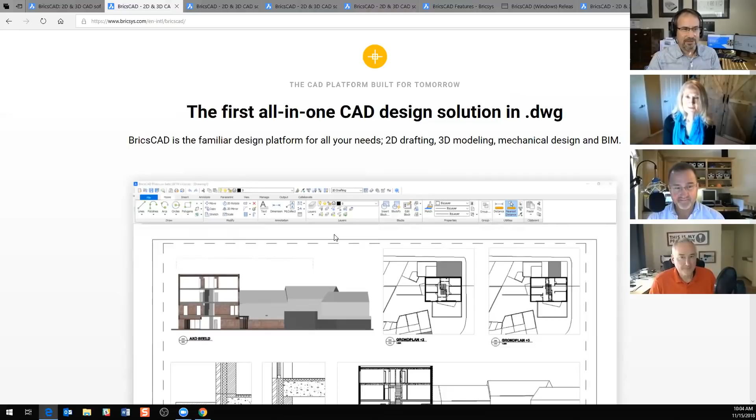Go ahead, dude. Yeah, so folks, if you go to it, it's a brand new website, same URL though, but as you can see, we have a whole new look and feel to our website, our products, and who we are. I'm just going to click through some of these. This I like a lot, just the first and all-in-one CAD solution for DWG. And believe me, folks, for somebody who's been around like me and my colleagues here on the broadcast, it's nice to see the file format DWG just grow to what it is and what BricsCAD has been doing for DWG.

Don, I'll pass it back to you to describe this one. Wow, yeah, so guys, people keep saying, well, is it faster than that other CAD product? Well, we've got 3 independent articles quoted here on this panel on the webpage, and you can see faster installation, faster execution of Lisp routines, and the CAD Tempo team did some analysis of a batch process, opening 500 drawings and making changes.

And Patrick Hughes published an article that's on our blog. The links are there live. The source article links will take you to each one of those articles so you can see the method they used to do the testing. In reality, it doesn't just feel faster, it is faster. And when you make drawings for a living, when you model for a living, when you create assemblies or building information models for a living, speed is super important.

Try BricsCAD now. Yes, and then also too, I love this, it's the welcoming for our AutoCAD users out there. If you want to come on over, believe me, it's a simple, easy jump. And we have lots of videos. Heidi and Robert Green did a great one back at our conference, and that's up on our YouTube channel. Yeah, check out the YouTube channel. All the conference videos are up there, you guys, and a lot of great new materials.

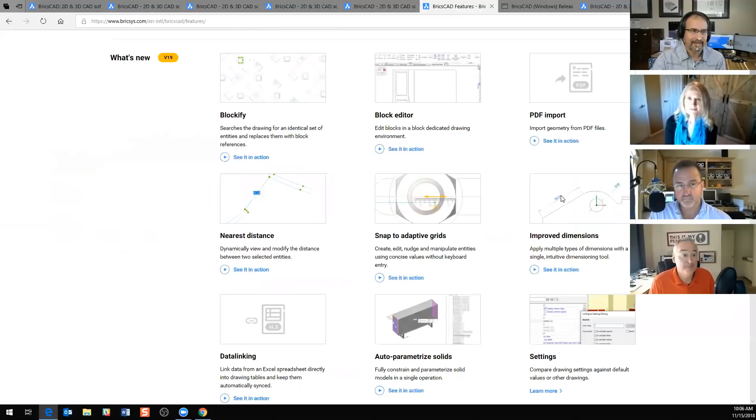Okay, now let's get into some good meat though, and this is where we get to let Heidi do some demonstration here. But everybody out there, there are so many new features, and we're going to show you a sampling of those. And Heidi is going to demo off, I think, Blockify first. Is that what you're going to do, Heidi?

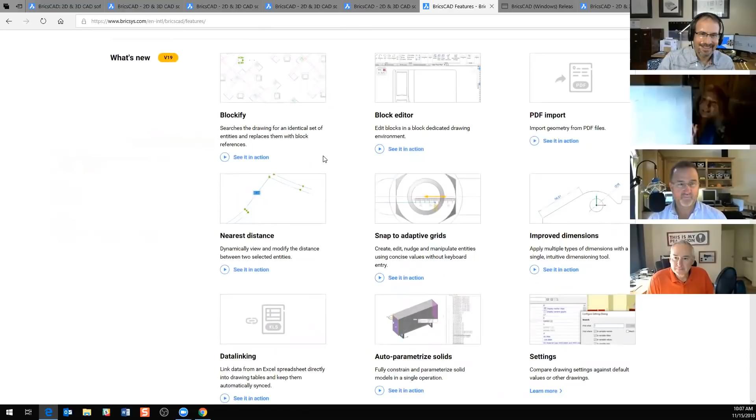I'm going to show some of my favorite features, Blockify and Parametrize, which are two of my magic commands. Just remember, if it ends in 'ify' or 'ize', it must be really cool and magic. I'll show you a few minutes of them. They're so cool, I like it.

Well Heidi, I'm going to pass it to you so you can share your screen and show us some of these new features. Great, thank you. Let me move you guys out of the way. Okay, can you see my screen? Sure can, yep. Looks like BricsCAD. Yes, it does.

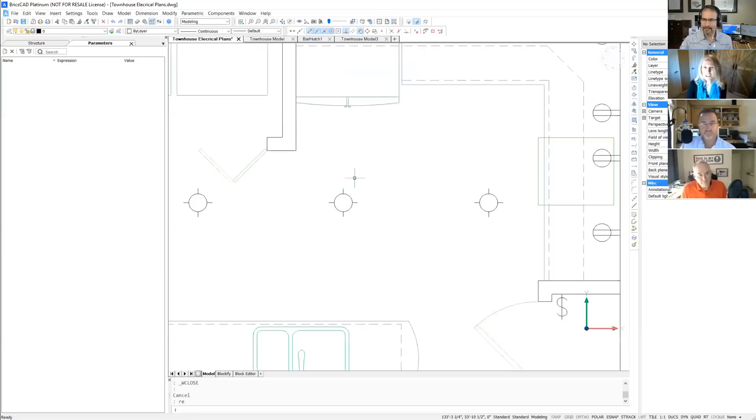The first thing I'm going to show you is Blockify, one of those magic tools. If you look at this drawing, there are actually 3 plans here, and this can happen often where you might have some blocks or symbols you insert, and then somewhere along the line they get exploded. Or maybe you just drew one with a bunch of geometry like this symbol here, just a circle and lines, and then copied and pasted it all over your drawing. But it's just a bunch of different entities, which is not efficient. It's bad practice, but it happens all the time.

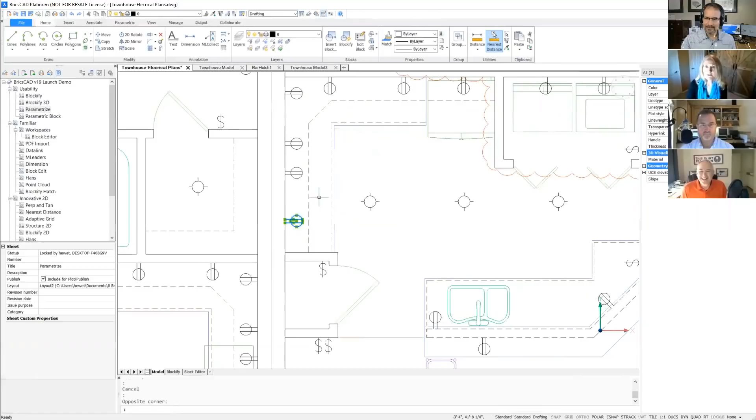With this magical Blockify tool, let me zoom into a few of these different symbols. All of these are individual pieces of geometry, each one an individual entity. What I'm going to do is select some geometry like this receptacle here, and then use the Blockify tool, which I can find in various places. Let me switch from my 3D workspace to my 2D workspace. Of course I could type the command as well, but we've got Blockify right here. So, select the geometry, Blockify.

Now it wants to know what I want to search for matching entities, like those same ones I just selected, so I'm just going to take the whole drawing. Now I'll specify the insertion point I want it to use when it defines this new block. Just like that, within a split second, it took all those little pieces of geometry and created a block out of those. That quick? And it tells us up here how fast — 0.2 seconds, and 96 instances.

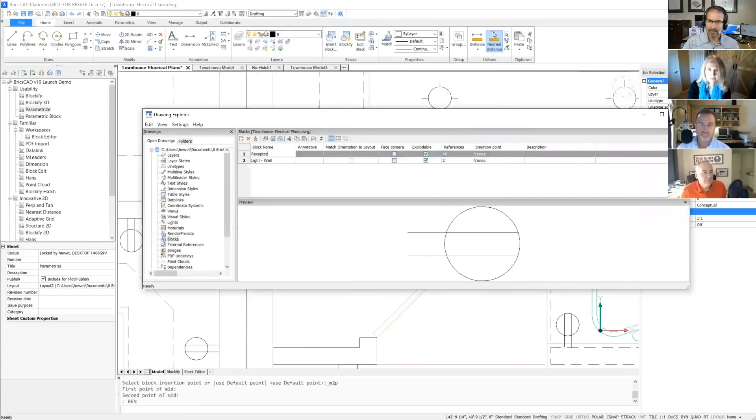So it created a definition and inserted it in all those places, and notice they're at different rotations — it inserted them just as if I would do it manually, but it would take a whole lot longer. So now we've got that block in there. I could do the same thing just as quickly with these other ones. If we look at the block definition, let me do a rename, because it just comes up with some default name. I find it called Block 1, and I could give it a more meaningful name, like receptacle.

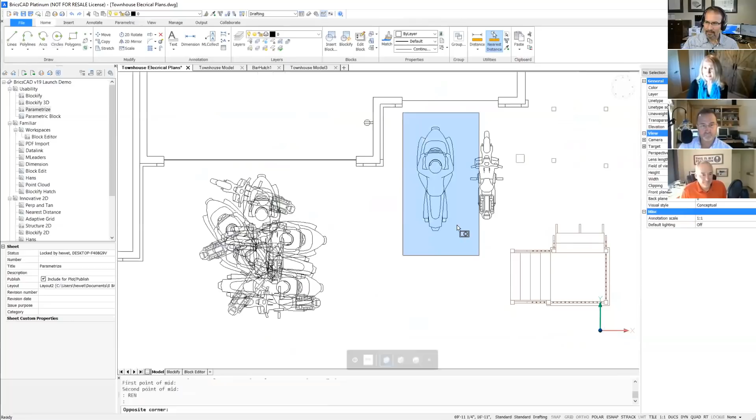Now, it's quite impressive where this can work. If you look at this jumbled mess over here, I've got these 2 different motorcycle type objects, but these are just individual entities, a whole bunch of them. If I select those and look at properties, you'll see that those 2 together are over 500 little entities. That's not good — if I had a parking lot where all these were inserted, that'd be a heavy drawing for what it should be. You can see these are all on top of each other — I actually have a total of 10 instances of these 2 blocks piled on top of each other right here. Blockify is very smart.

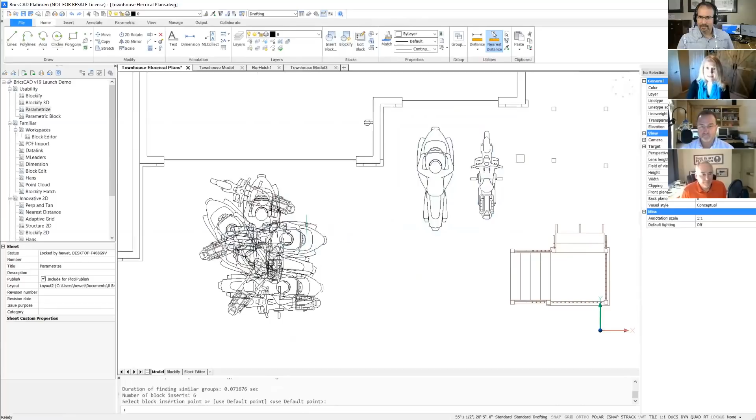I'm going to use it again. I'll select one of these sets of objects, then Blockify, and just search the whole drawing and take the default insertion to be quick. Now I'll repeat it for this other set of geometry, and just like that, within split seconds, it has taken that geometry and turned it into blocks, even though it was piled up on each other there.

Yeah, amazing — I told you they're magic. That's actually cool, it's CAD magic. Yeah, we might rename it that. When's the last time you guys saw any CAD magic, huh?

It's been a while. I might have to rename the product CAD Magic. I like it, yeah, okay, but there's more.

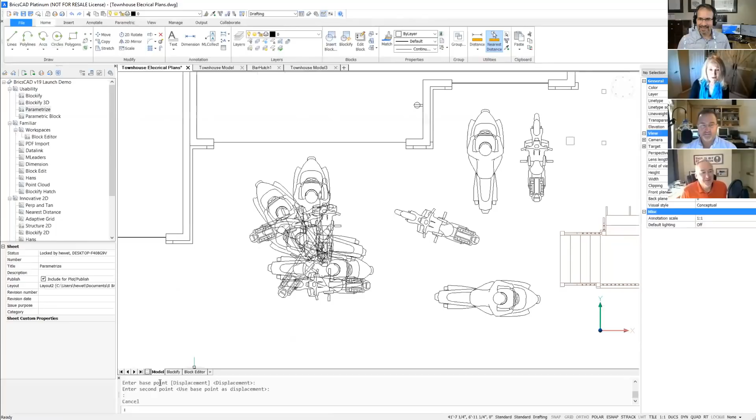Wait, there's more, let me go over here. So that was in 2D. It also works great in 3D, and it may apply to cases you don't even think about.

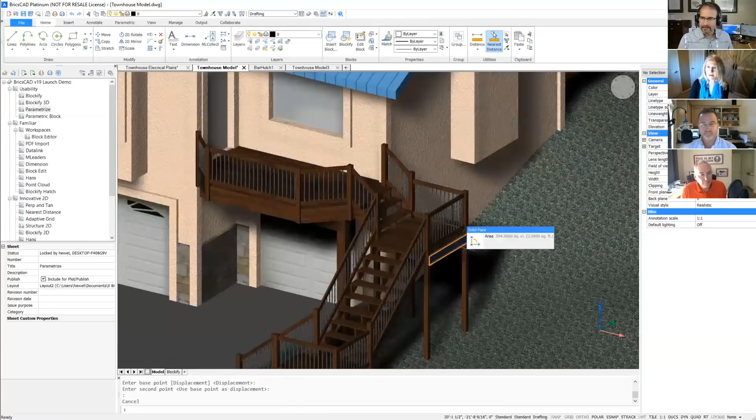This is a model that I created, and it's a duplex. So I modeled half of it, and then I mirrored it to create the other half. There's some things in here that look like obvious candidates for blocks, like the spindles on the deck here. So if I were smart, I would have created those as blocks and inserted or arrayed them. And maybe I did, but then they got exploded along the way, because that happens.

Really, those are the only obvious instances, maybe the fence posts back here, that are repetitive objects where you'd want to take the time manually to create a block definition and then insert it. But there are some less obvious ones here, because I created this as half the building and then mirrored it and moved it up to create the duplex. There's really at least 2 objects - everything in here, every solid object, there's at least 2 of them in here. But I wouldn't go through the trouble of defining each of those individually and inserting them just for a couple instances. It wouldn't be worth the time.

But with Blockify, it's totally worth it because it's about a second. So I'm going to choose Blockify again, and I'll just accept all the defaults - hit enter twice. Blockify, hit enter twice, and that quickly it went through the whole model. If we look at our structure panel, we can see it lists all the different entities. I had these few ones up here before, the faucets and the sinks, but it created over 700, over 800 blocks just like that.

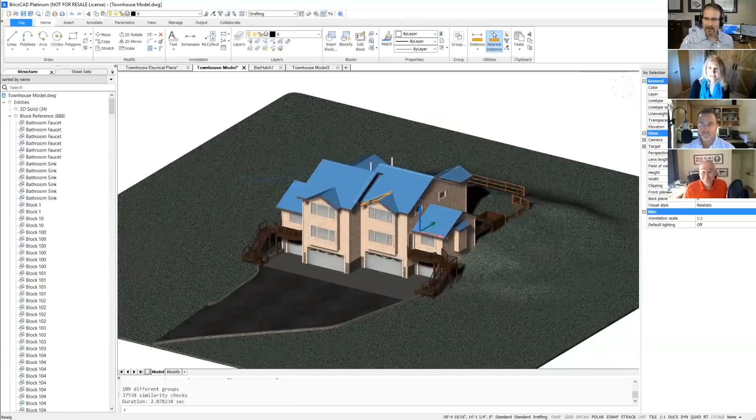And it did it for things, check this out, things you wouldn't think of. I wouldn't even think of making a block out of something like this window trim, but because it had 4 instances, it went ahead and created that block and inserted it for me. So it's magic. I don't have to keep that - if I want to edit this geometry, these solids, I can always explode them or go into the block editor and edit them. But how magical is that?

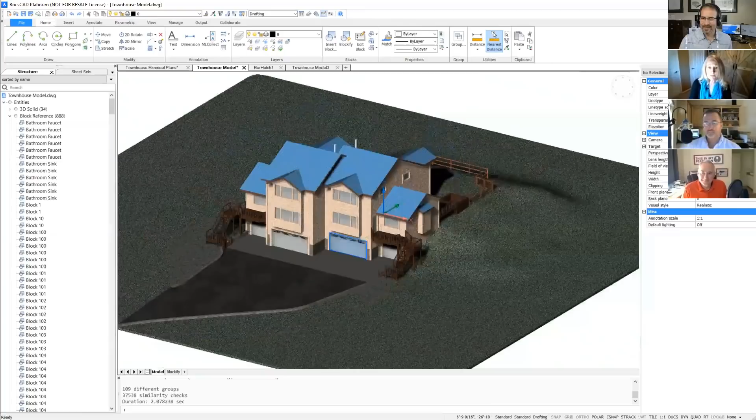And I forgot to - when I first started, I should have pointed this out. This was the file size, my file size - it was over 9 megs. Now I haven't saved the file yet, so let me go ahead and save it and we'll see how much that one second of work did. Let me give it a different name so I don't overwrite it.

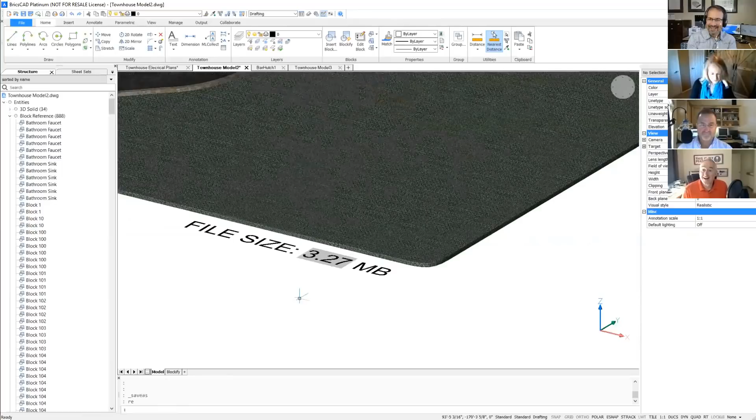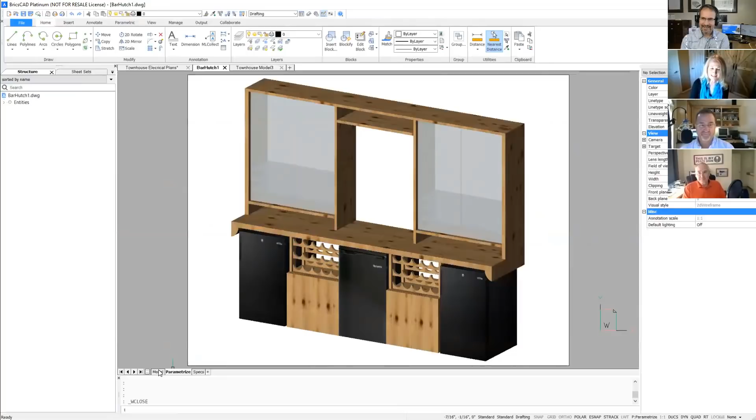Now, the other one I want to show you, and I know I'm kind of running out of time. You can go on and on and on. Oh, I could go on and on and on. I want to make some popcorn and just sit here. So I had so much fun. I have to tell you guys, when I went to Calgary last week, I was playing with Parametrize on the airplane, and I was sitting there by myself in my airplane seat laughing and giggling because I was having so much fun with it.

So this is another example, something I'm actually working on for my house. It's a bar unit, so it's got various appliances down here, and I'll turn on the shading so you can see it better. Someone joked that's a pretty strange color scheme for a house - well, creative, no, it's going to be all live edge wood, and it's going to be really cool, and glass.

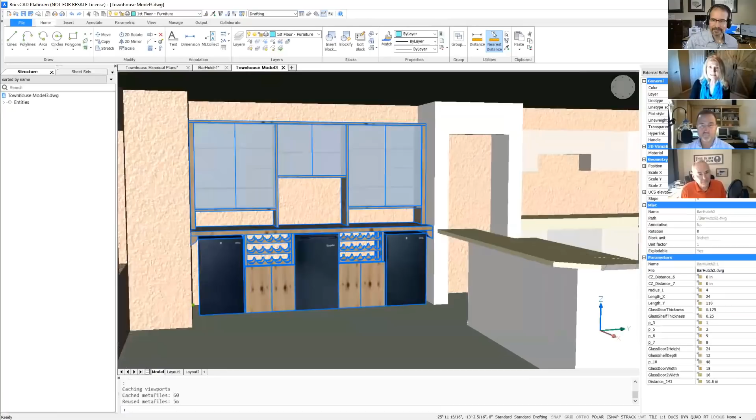So I've been working on this and actually wanted to parametrize it, because initially I don't know what sizes I want for the glass. I want to try to minimize costs by purchasing standard glass sizes, but it's basically going to fit in this area right here in my house, so I've got these limitations, various constraints.

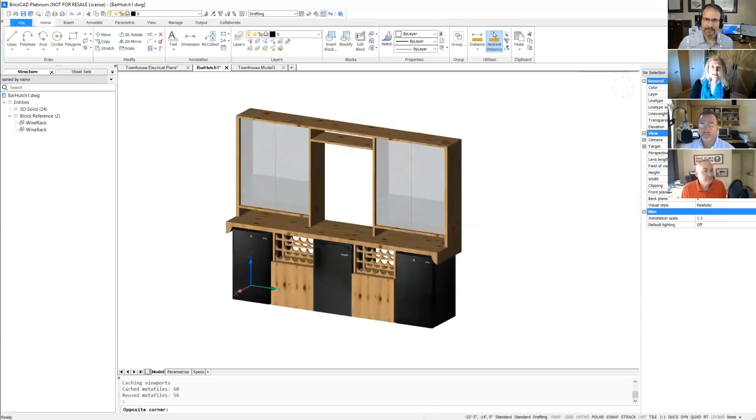So what I did - right now this is just dumb solid objects. If I look in here at the structure, the wine racks down here are blocks, so I'm not going to parametrize those right now. I can sometime, but not right now. The rest of these, all these objects up here, are just dumb solids. I could have created them in Shape or AutoCAD or BricsCAD - really just about any solid modeling application. I did that in BricsCAD, very easy to do, but they're still dumb solids.

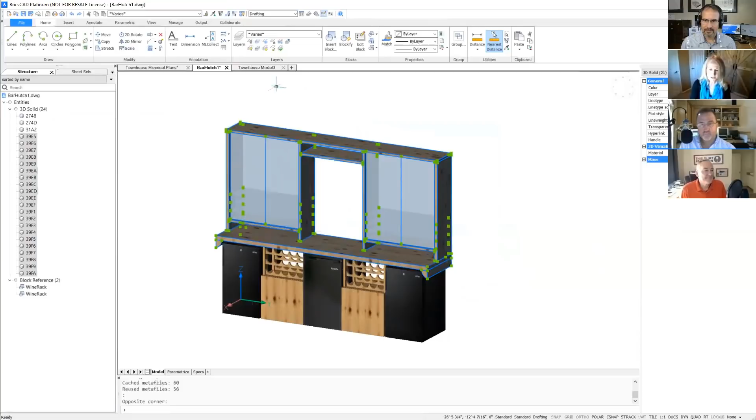I'm going to show you how easy it is to add intelligence to this - it's another magic tool. So if I go in here... I'm going to use, it's because I don't have my 3D - I need my 3D workspace.

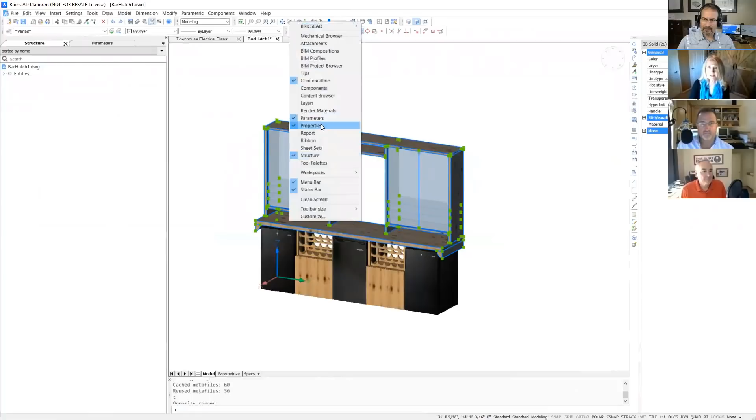Okay, so select my objects, go in here to the quad, and we've got this new tool, Parametrize. Of course, you could just type the command as well. Watch over there in the structure panel and see what happens... actually, I'm going to pull up the parameters panel right there.

Okay, so if you look in the parameters panel, nothing is displayed there because there are no parameters. This is just dumb solids, okay?

So go in here again, and I am just having issues with my right click. I'm trying to hurry, so excited. She can't click straight. I can't click straight. You're right. So I did it.

I selected them, ran Parametrize, and look what it did. Oh my God, wow. It constrained all those objects, this whole top hutch that I created.

So those are all constrained now, it's fully constrained. Think of what it would take manually to go through and do this. If you've never used parameters, and I've used them a little bit, it would take forever, and just even figuring out what to do so that it would be fully constrained.

How do I know which one of those is assigned to what geometry? Great question, that was a setup actually. If you're not familiar with parameters, this can be a little overwhelming, and you don't know which thing drives what geometry.

You can right-click on one of these parameters and choose Animate. Watch over here - I happen to know that this is the radius of these little logs for supporting the structure, so just watch those logs. I'm going to choose Animate, and you can see it's showing they're getting bigger and smaller.

I can do that. These ratio 1 and ratio 2, those are a little bit confusing to me. I'm not quite sure what it's getting a ratio from. Choose Animate, and you can see that's actually the shelf depth of the wood pieces there.

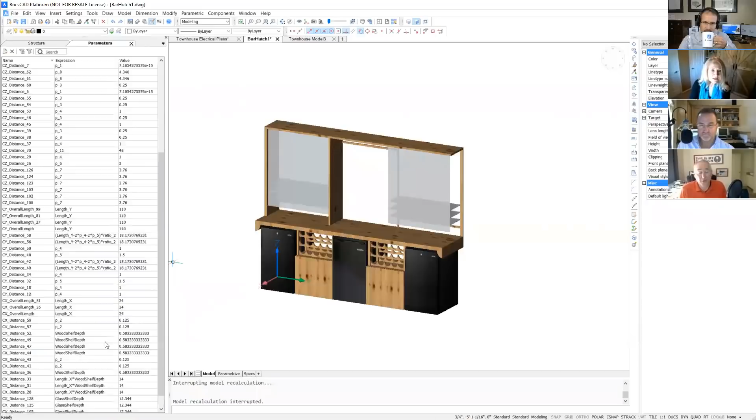Let me just do that real quick because I want you to see. Yeah, it was like 0.05 something, right? Yeah, which is okay, the ratio is still the value for the depth now. You want to change it to a real value, something more meaningful. But I'm going to show you quickly.

And by the way, as I'm copying these, just to let you know, I'm actually going to do a blog post about this for next week, and I will go through in detail exactly all the changes that I would make to customize this exactly to my needs. But I do want to point out here, this wood shelf depth - so it's this crazy, I thought I modified those.

I hope I didn't mess something up. I'll have to look. Even the experts have issues, for rushing. I know, it's because I'm rushing.

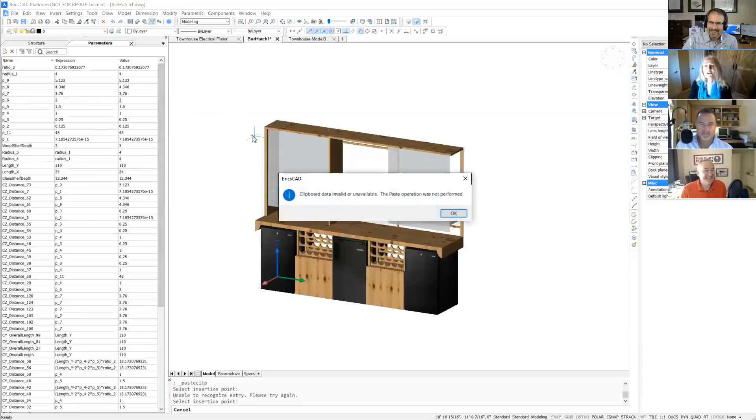But let me show you the ultimate results of this. Oh, there it goes. Maybe I just needed to update it.

Okay, so right now wood shelf depth is some crazy little amount, 3, okay? So I could change it to whatever I want. I'm going to say 12, and you see it modifies.

But what I really want is for it to be based on the shelf, the glass shelves, because I'm going to buy those at some standard size. This wood is going to be live edge, so I have to have it cut anyway. I want it to be just a little bit deeper than the glass shelves. So what I'm going to do is make that an expression with the glass shelves.

Oops, this one here. So instead of being some specific value, I'm going to say I want it to be glass shelf depth plus, say, 1 inch. Okay, so now as I change glass shelf depth, look at that.

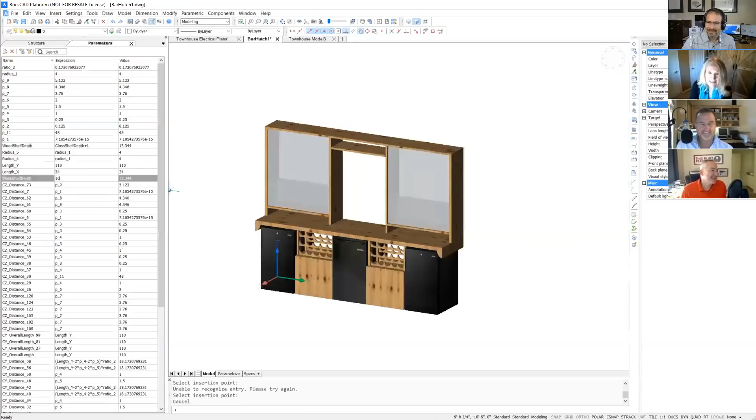3 times fast, it's going to— that drive is impressive. Nice. Okay, so let me show you the ultimate result.

I went in and added some more shelves. I decided I wanted this shelf to be further down, and I added glass there. So the final one that I came up with, this is the design I think we're going to build.

I inserted it, added a few more parameters, inserted it into the model, and now we can actually drive that, because when I inserted it using the BM insert command, it's actually a block. So that means all those wonderful parameters I have access to in the block definition, I can drive right here and see what it's going to look like in context.

So I might want to change, let's say, the height here, 48, let's say. Maybe I want to see what it would be like if it was only 36 tall. Okay, I can completely customize this.

If I want to check my different shelves, maybe I want to see what it would be like to have shelf height be 30 instead of 24. Oh, that's not so good. Okay, so I can completely drive this.

I had so much fun with this, and I can't wait to build it. I will show you when I build it.

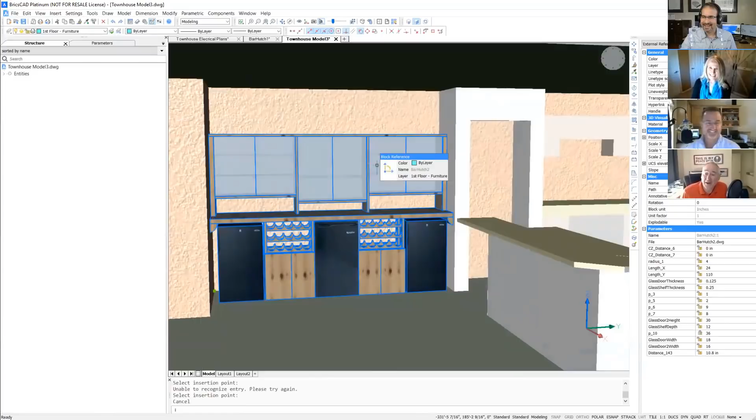And I'm sorry I went way over my time. I knew I was going to. You're totally fine. Mommy, who's the crazy lady on the airplane? She's laughing at her computer.

I know. By the way, guys, I know Heidi was showing you a lot. There's filters at the top of the parameter panel, so you can filter by name. You can search for these.

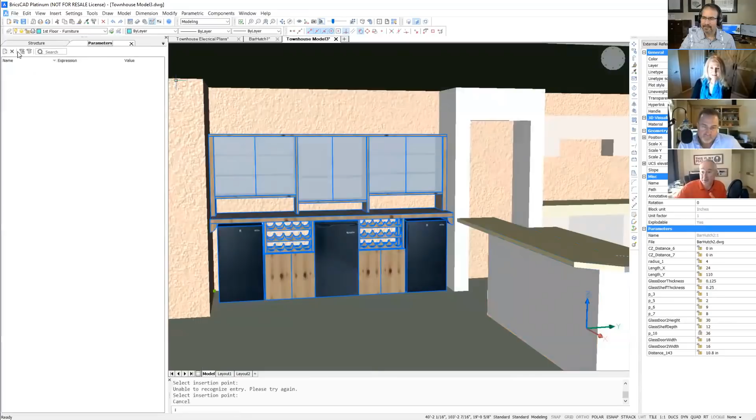And I think that can help you organize them. The auto-parameterization is amazing, but how you set up those relationships later is what really gives you the ability to drive it. So we've hacked 90% of the work out of parameterizing, and now you can focus on actually creating a drivable entity instead of something that's just all mishmash, right?

It's very cool. It is, and one of the things you reminded me, talking about the filters, I actually just started using that parameters panel this morning. That's why I was a little bit rough. I was using the mechanical panel up until this morning when the team reminded me about this new parameters panel. So sorry about that, but that shows you how quick you can learn, because I just started using it.

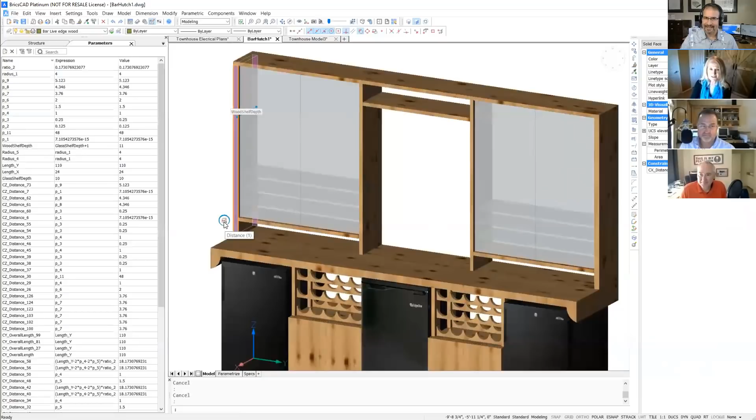They also pointed out, and I wanted to mention this, that when you add these constraints, another way to find out what the constraints are driving is you can select a face. So if I just select a face right here, see that little icon that displays, that is telling me it's got that constraint on it. If I pass over that constraint, you can see it's a distance constraint. Oh, look at that. That's nice.

Yeah, very cool. I just learned about that this morning too. So this shows you how quick you can work with this stuff, because it is very intuitive and just magical. So we are still finding new features in V19 even after it's released. Now, guys, Heidi has built a new core feature document that's like, what, 40 pages long?

A lot of pretty images, amazing, so don't let it scare you. We delivered it to the development team and said, hey guys, now that you got a little breathing room, can you take a look? And they're like, oh hey Heidi, you forgot to add center marks and center lines, and you forgot to add this, and you forgot to add that. There's more.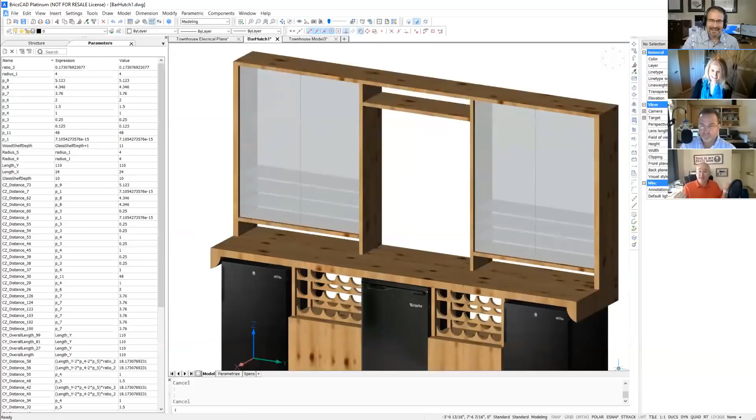Still discovering features like this after we ship the product. This is amazing, you guys. We're so happy to be able to bring this to you. Heidi, great job, thank you. Sorry, I went over. That's okay, there's going to be a lot more too, guys. We're going to be doing a lot more show and tell, because it's really important for you to see the power of V19. We're just so pumped.

Vince, you had some things you wanted to talk about licensing. Yeah Matt, can you show the promos? I think a couple things are really important to keep in mind. Of course, BricsCAD is a perpetual license, right? You do have the ability to buy a subscription if you want. Can you click on the Discover our pricing? Yep, our price is the same for any language, any version, any platform - the 3 platforms that we have currently.

Right now if you look on the website, you'll see the pricing. We have a promotional price that is good through, I believe, December 15th, which is the deadline. The promo price is the price now. If you look at the prices, like for Classic, it's $781 for a perpetual license, and that also includes all-in maintenance, meaning when the next release comes out, you'll get that as well. So maintenance is included in that price, or the other price, $312 - that's an or, that would be if you just wanted to do subscription. If you're used to that model and don't want to own the license, you just want to rent it, then you could use the subscription price.

But definitely want everyone to know there's a promo going on right now. We just released 19, it just came out, and so for the next 30 days we've got some great pricing models to get you from your current version into V19. And by the way, if you're an existing customer, we have some very special upgrade pricing for you - it just went live this morning. We got feedback from a lot of our longtime customers that, hey, we love this idea of all-in maintenance, but if you put pressure on us to move to maintenance, then our upgrade price goes up, and we realize that can be a financial burden for some of our customers. So again, until December 16th, we have some very special pricing for existing customers who upgrade to V19.